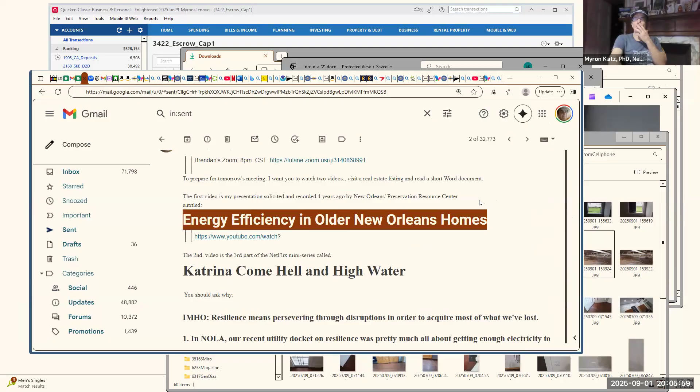The resilience that the city council focused on in their recent docket was about making sure we have enough electricity after a storm, so we can keep the lights on and the refrigerators running. As important as that is, it pales in comparison to the issue we're currently talking about, which is featured in this part of the Netflix movie: building buildings right, and when they weren't built right, how did it really hurt people? We're going to be talking about that.

And the third kind of resilience is resilience against climate change. Those are the three kinds of resilience we're going to talk about tonight. The content we get to choose from is way, way more than we could ever play in an hour. In fact, just one of these three Netflix things is almost an hour by itself.

And then there's also this thing that I gave you a poor link to, which is the energy efficient homes talk I was giving. So I'm going to jump around a little bit in here until we sort of find our place, and then I'm going to open up for questions.

So, Myron—but before you... yeah, he has his hand raised. Okay, what's that?

The stuff I'd find most potent on this takes about 5 minutes to present. I don't want you to tell us about climate change right now, I know. It's a trifecta, because what I'm really calling for is people to monitor this stuff. Okay, well, we're not doing that tonight—we hardly have time for what's on the agenda. Just join the agenda and comment on it, and if we run out of time, you can do your thing, but I don't think we're going to have even enough time. I'm definitely interested, Tor, just to let you know. So yeah, what Myron's done with this—you can tell us more, we'll make sure to put it on the agenda at some point.

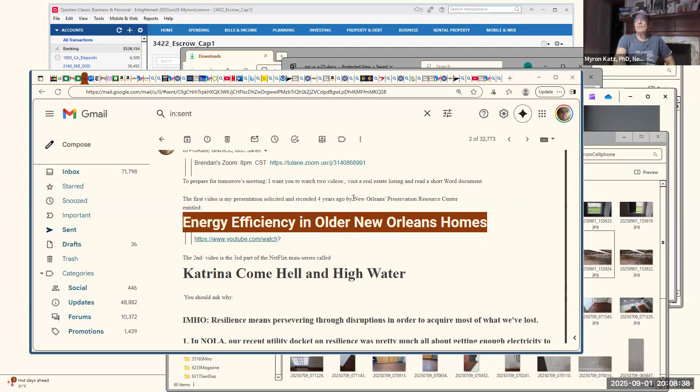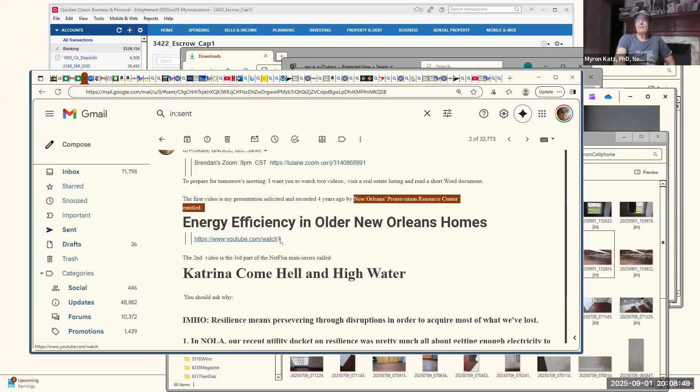I actually was asked to present to the New Orleans Preservation Resource Center about 4.5 years ago. The video is here, although unfortunately the link isn't the right one because it doesn't tell you where to go. But I actually do have it dialed up over here.

So this is the actual presentation, and I also have it—let's see—so I'm going to come back to this timestamp, which is about almost 3 minutes before the end of the meeting.

Let me just go to the beginning of it to show you what happened. So, as I said, I was asked to speak, and that was the title of the talk: energy efficiency in older New Orleans homes.

And it starts with introductions by this person here, I'm sorry, I don't know the name, and her supervisor. They talk, and then they eventually let me talk.

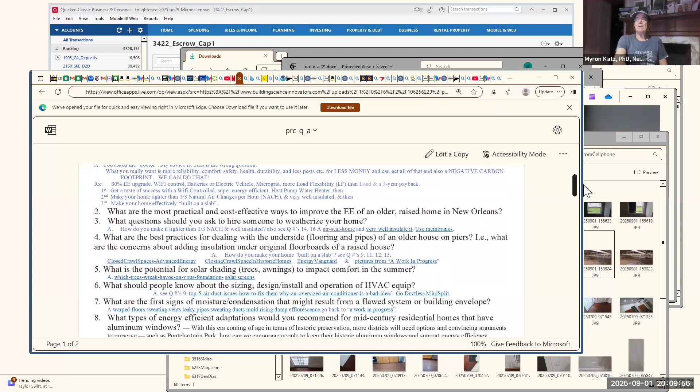What I do is I take a Word document which collected all the questions. Here's the same Word document I put together for the talk. You'll see there are a total of 17 questions they asked me to talk about, and I was given a hint as to which one was most important. So I talked about the first 3 first, and then pretty much ran out of time. By the time I finished the next 3, we got some Q&A.

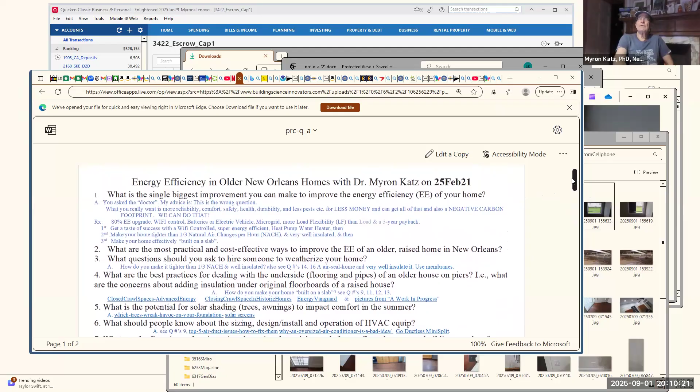The question that was asked most often is, what's the single biggest improvement you can make to improve the energy efficiency of your home?

I quickly say that energy efficiency is not the right question. The right question is resilience, which is what all these words together sort of come together: reliability, comfort, safety, durability, and less pests. And do that for less money, and you can get a negative carbon footprint. We can do all of that in a home. Energy efficiency is clearly the first step, but it's not the end of it.

So I start to explain it. I'm going to give a little bit of a snippet of how I start to explain it, and you're going to see it's very comprehensive, but it's also very time consuming. So we're going to get into this a little bit over here and show you how I start off, and we'll play it from wherever we are.

Okay. I don't know why it's going slow. I do not know why. Okay. Come on, this is possible. Well, you can press the play button or you can refresh. Oh, you're right, I forgot to press the play button.

We're going to focus on the energy efficiency upgrade part, to get a taste of success right at the beginning with a Wi-Fi controlled, super energy efficient heat pump water heater, and see how far it takes us. And then we'll make your home tighter with 1/3 natural air changes per hour and very well insulated.

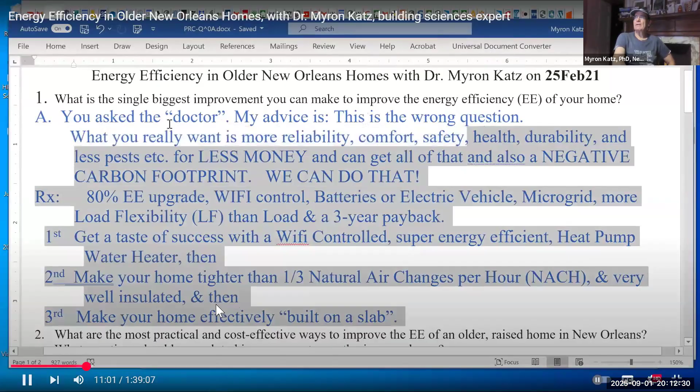And make your home effectively built on a slab. So I'm going to do that with a series of graphics, and these graphics literally come from links on this page. I'm going to minimize this size again and show you where the links are so you can find them yourself.

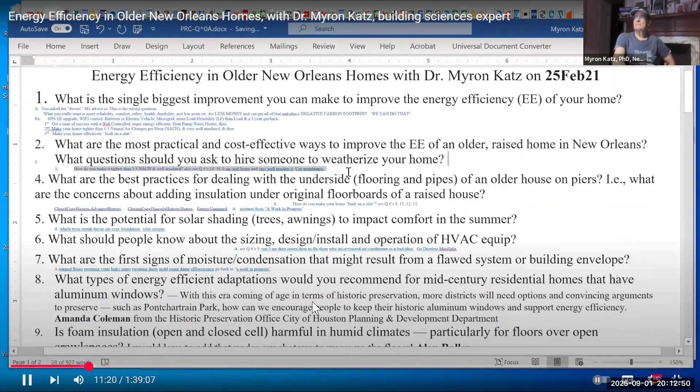So this is one of the links we're going to go to, Air Seal Your Home. We're going to go there afterwards, but I'm going to go there first so you can see what I'm talking about. Let's see, go up to 16 on this. And this is a link right here: Air Seal Your Home is an active link, as well as very well insulated, as well as use membranes.

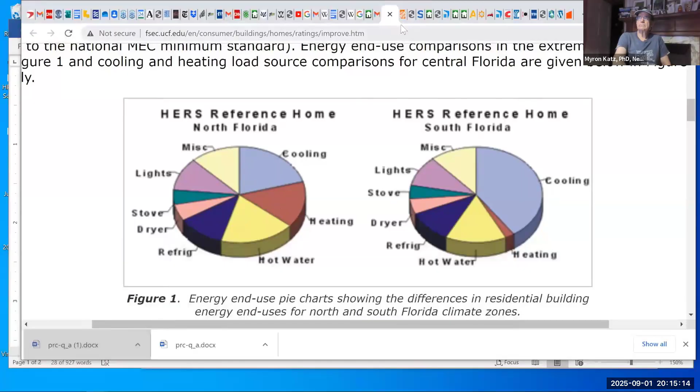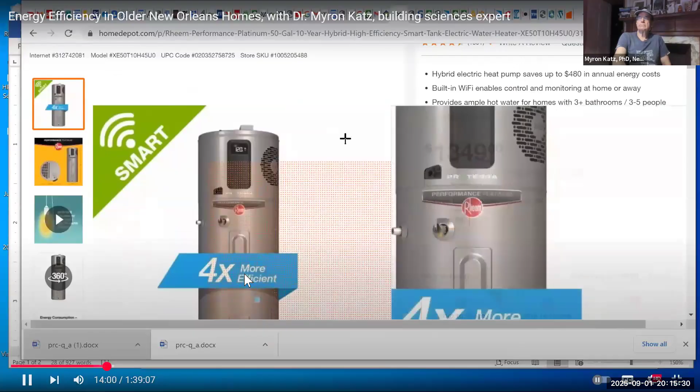First of all, I want to tell you what I promised. Remember, I said I want to get your home 80% more energy efficient than it was before. The first thing I recommend, since it was asked what's the most energy efficient thing you can do, is buy this water heater. This is a water heater that's 4 times as efficient as the one you have, which means that $200 cost for water heating will now go down to $50. And it costs under $1,400, but you get $700 in rebates, which means you get it for $700.

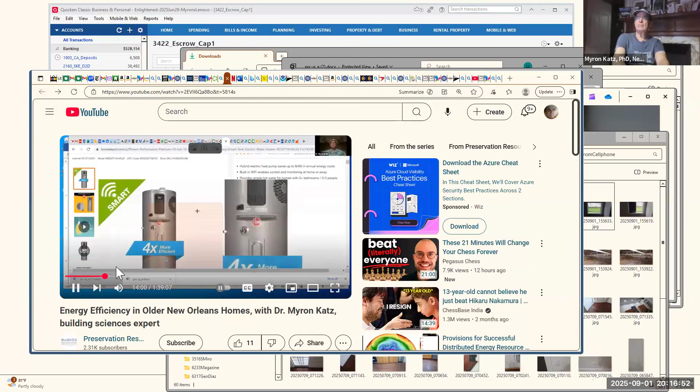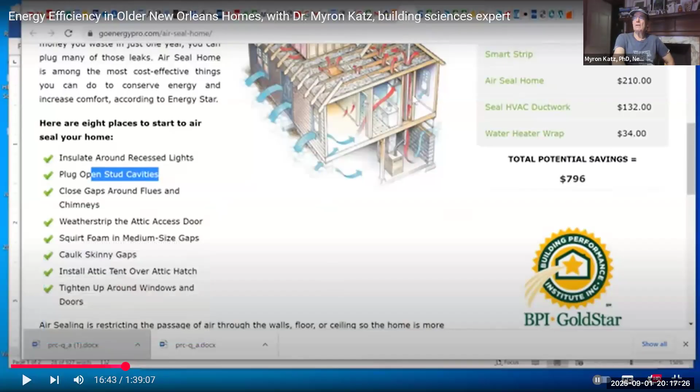This is a part of the slide talk where we talk about what an old home looks like and all these various defects. It leaks around the windows and the attic vents, and this thing, which I described sort of like a pocket door. I go a little further and talk a bit more, jump further down to it, and I say, okay, we want to fix all these things.

And I show lots of technologies, including putting plastic into the insulation, tightening the windows, putting a radiant barrier under the roof. But one of the biggest ones is enclosing the crawl space. All those are explained in pretty good detail, over and over again.

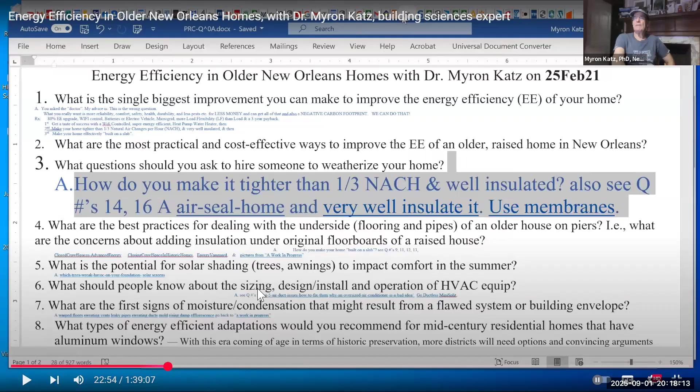And even at the Q&A at the end, people say, well, how do I insulate under my house? And I say, you use a closed crawl space. Then I say, well, how can you get your insulation working super well? You encapsulate it into membranes, and that's explained in here too. I'll jump to that part where we talk about the membranes, okay?

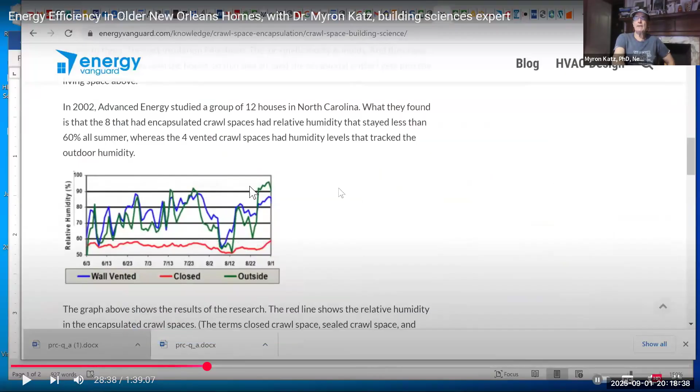So let's see. This is about enclosing the crawl space, and they show you that a home that does have an enclosed crawl space, the humidity goes very low. It jumps all over the place without an enclosed crawl space. Very big deal in New Orleans. So you want to enclose a crawl space. Not only that, the ground below the home is around 71 degrees year round, so why would you want to insulate your house from that? It keeps it cooler in the summer and warmer in the winter.

So I actually go through a description of studying an average balloon frame home in New Orleans. This is how we build them if they're balloon frame, which is something we stopped doing over 100 years ago. And I showed how you might do an enclosed crawl space, and this is a work in progress. I'm skipping because there's too much to explain. Then I go back and explain: if I make the home tighter and effectively build it on a slab because I've closed the bottom of the home...

The open crawl space is now closed. I'm moving it toward this scenario and getting the energy bill way lower.

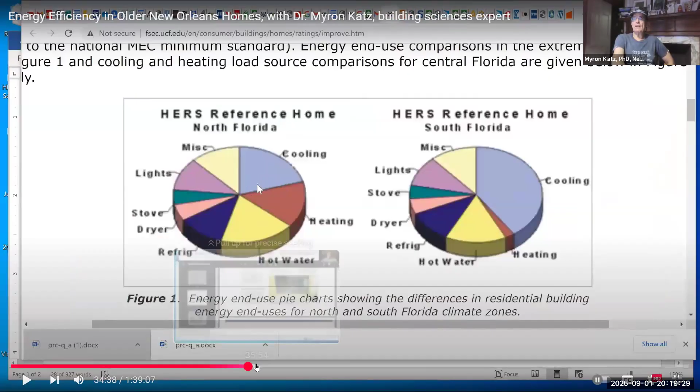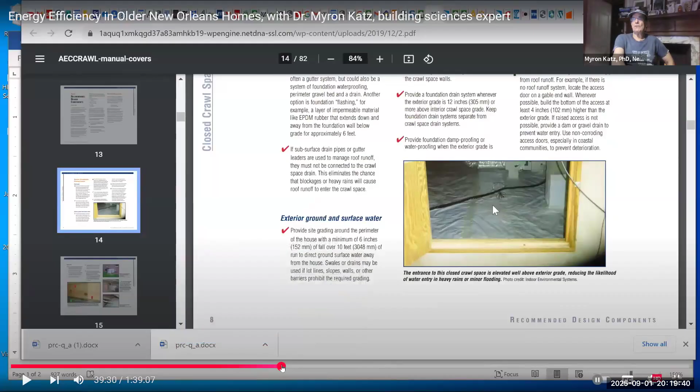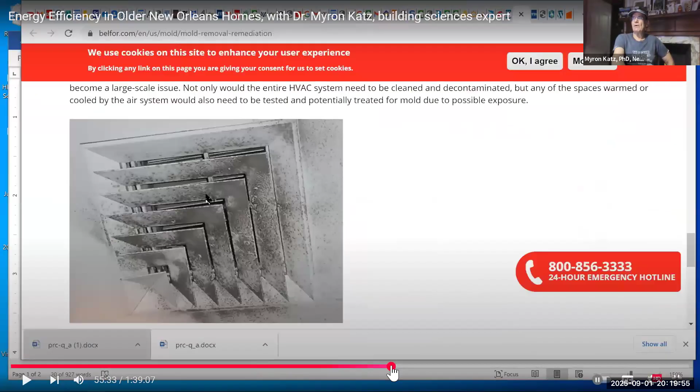This is all explained in extensive detail in an hour and 40-minute video, which we had a chance to look at. Near the end of the video, I want to show you the various reasons why you shouldn't use ducted air conditioners. You should instead go with a ductless mini split. I explain why, because of moisture problems that can occur and can be avoided, even efflorescence, which damages brick. Then I explain this is the kind of cooling system you want.

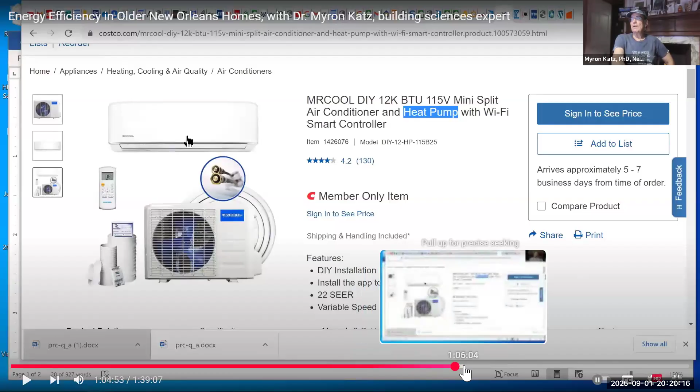I'm not going to do it now, because if I did, I'd spend a similar amount of time as that talk, an hour and 40 minutes. What I want to do is get to the very end of the talk, because it touches on the resilience issue we were talking about.

That previous picture shows that a heat pump water heater is really an air conditioner on a tank, and that's why it works four times better. But getting back to this picture again, how you make the house tighter. Making the house tighter is far more important than anything else.

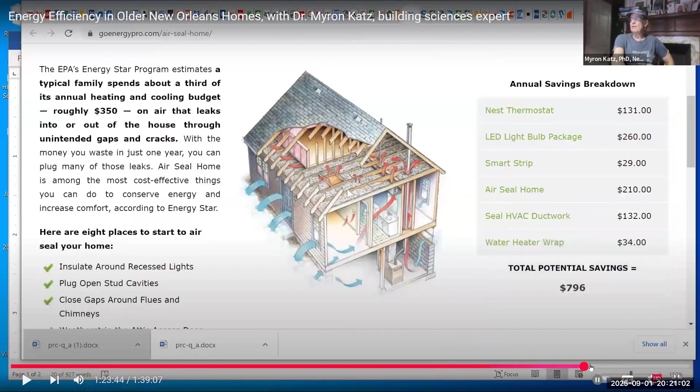So I said you need to do it, and then this is where the weather stripping example is explained. At the end of the talk there was a bit of a Q&A, and I'm trying to get to the end of the talk. By the way, this is on our Building Science Innovators website, in the presentation section, where you'll find the same document we're looking at.

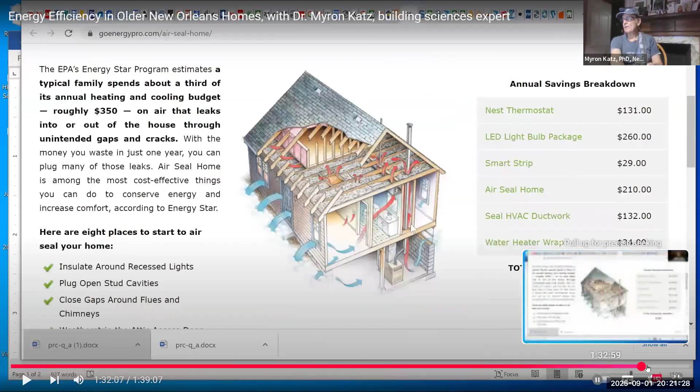If you want to see the video, you can find it on YouTube, since that's where it is. At the very end of the talk, I want to play the part about the resilience issue. It's about right here, I think. Let me press play and get us to listen to that.

So electricity when it's cheaper, like the windmills in Iowa, we get the advantage of that. It's very, very good for the environment that we buy electricity when it's cheaper, because we buy it when it's cleaner. And if we have the economic incentive to do it, we can make money.

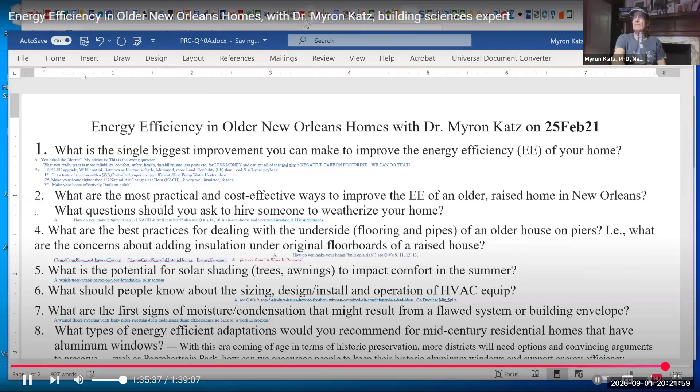Even a simple electric water heater, which is what this slideshow was talking about, if we choose a regular electric water heater with the retrofit we're talking about, it will generate $185 a year in income just by changing when you charge it. From charging at any time to charging in the middle of the night, you can get this much income, and that's only available with this time-of-use rate called CLEP that I'm trying to propose.

And if people get excited about my deep understanding of building science, maybe that will segue into respect for my ideas and generate a groundswell toward a solution that can save your money and save the environment. Maybe New Orleans would be a place you can walk in 50 years instead of swim. Let's hope.

The comment that this was fascinating but also overwhelming really underscores how much of a topic this is that people care about and want to know more about. We'll try to take deep dives on specific elements of this. This was incredible, Dr. Katz, that you could give us this big overview. Maybe we could come back and do segments.

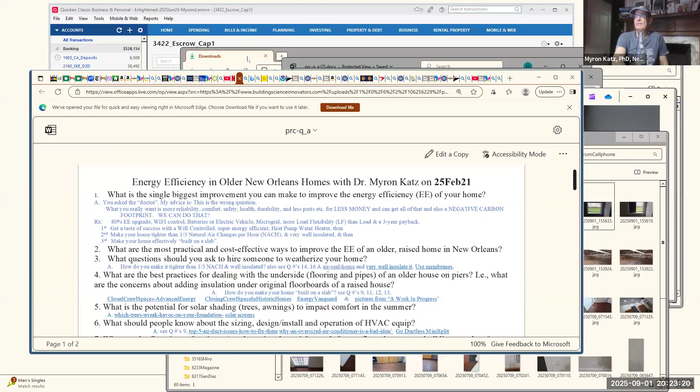I'm gonna jump out of this because we're not interested in listening to how I'm lauded, and instead try to jump to the other video, which is the video from Netflix. Let me try to get there, and I have the windows open for that.

Here's the Netflix video, and as I remind you, this is the Katrina: Come Hell and High Water video. It's a three-part series, and I think by far the most important one to watch is the third one. I'm focusing on how to build a home so it's resilient in this particular part of the talk.

Its footing and showing an incredible amount of resilience. If we can save the Ragged Boot Heel of Louisiana from climate and New Orleans disintegration, then that's a big message for the rest of the country. We were the heroes of the Ninth Ward, and he was one of those heroes.

Brad Pitt, the savior of the Ninth Ward, he was our savior, and he brought this new project, this green project, this carbon footprint replacement project to our community, and he brought in 150 of those families, built 120 houses.

But ultimately this is not about me, it's not even about all the people who have been working so hard on it. I'm pausing right here because when Global Green presented this idea to the building science community and the architects, we jumped on it. When I say we, Christopher Faust jumped on it, and other members active in our list, we jumped on it and said we want to compete, we want to help design the home that's replicated in New Orleans.

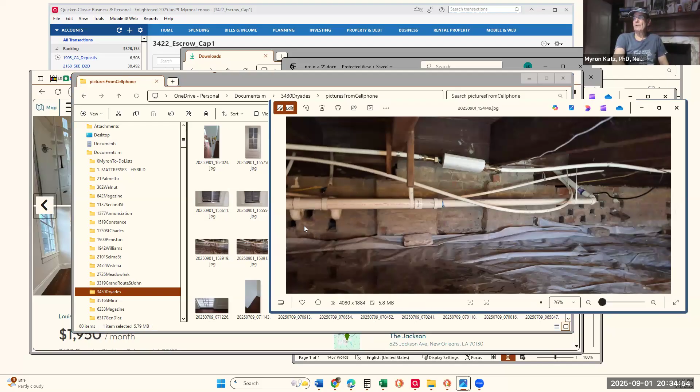So if I go to a slightly different view, I'm going to show you what it looks like in the crawl space. I'm going to go over here, and this is a view in the crawl space. It's not very pretty because there is some water on the ground. However, you're going to see other pictures of the crawl space. Let me see if I can get to the other pictures over here.

Okay, these are pictures taken in the crawl space today at the end of the summer. And all of these condensate pipes from the ductless mini splits dumped into this crawl space, and there's a residual about 10 gallons of water. You'd say, oh, that's a disaster. On the contrary, it's a success because these air conditioners probably put 2 to 5 gallons of water each day, and throughout the whole summer, this is the residual.

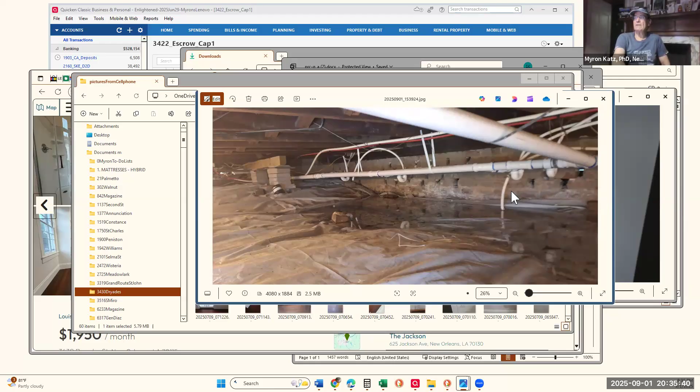I actually knocked on these walls. These walls are all solid. None of them have any mold concentrations on them. And it looks like a disaster, but it's actually a success. Some of these condensate lines should have been actually put into these drains, and that would have decreased the amount of water that got in the ground, but it never caused a problem.

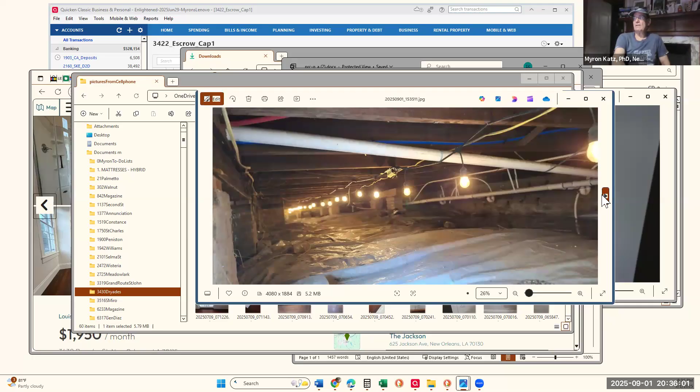These are more pictures of the crawl space. It looks at first like it's a problem, but you can see it's bone dry all the way through here. The spiders love it, and that's what it looks like. Okay, and I did that today to show you that you can build something right and it's durable. And you don't have to build a new building to show how to do it. You can do it with a 140-year-old building.

So this segues to pictures I have inside the building, which is not so much the point. But I do want to show you some of the features of the building, which make it very, very important. So instead of going to these pictures, I want to go to the document. It's the same document that's at the end of the email. It was the attachment.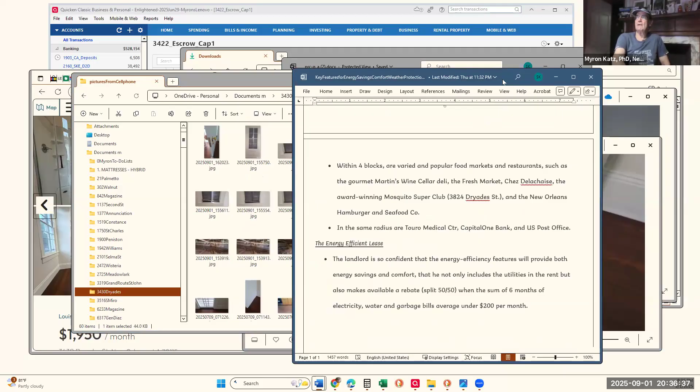This list of key features of 3430 Dryades Street was put together by my wife and I in order to help the tenant, first to attract the tenant, and secondly, after the tenant moves in, to get them to understand what the features are. And the first feature right here, I'm going to explain this with pictures. It says there are 5 screen windows and 4 pairs of exterior shutters that are fully operable from the inside. You may not realize how incredibly unusual that is.

So in the pictures you saw before of the house, let me try to get over there. In this set of pictures, you see that there's shutters on the windows. See, there's 4 pairs of shutters. Now, normally shutters can only be opened from the outside. Why? Because there's a screen between the windows and the sashes, so you can't access those shutters.

But in fact, I'm going to show you with the pictures I took today. I'm just trying to get there. This is one of the pictures in the series, so I can get it to go. Okay, so what I did was go backwards. I stepped back and took a picture of the whole window.

I'm inside the first bedroom from the front of the house, which, by the way, I can show you among these pictures which room that is, but it doesn't really matter. You can see it's a room like this room, where this is the same window we're talking about, viewed from a different angle. Okay, this is the window. Let me show you the window before it's opened. This is before it's opened. And if you look closer in the picture, you can see me in the reflection in the mirror.

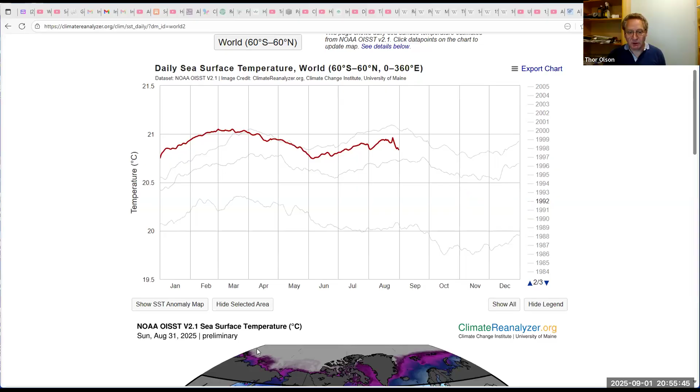But what I really want to point out is that in the 20 years since Katrina, sea surface temperatures are up almost a degree Celsius. And that is my reminder of how much change has happened over that period of time globally. There's been substantial technology changes, substantial demographic changes. I'm not trying to scare you with all this information, it's just that I struggle to express to the wider community of GNOICC and ProRate how much change there's been in the background.

Your motivation to improve the efficiency and the quality of the houses is admirable, it's right on target. My uncle did the same thing - he'd buy a rundown house and fix it up. That was entirely appropriate for that period, from 1980 to about 2005 when Katrina hit. So much of the things about ProRate are designed about making us better prepared for the next Katrina, which I think is spot on and admirable.

But there's these new players that weren't there 20 years ago. Maybe the most formative - I'll just paraphrase it - I had a dialogue with one of the top climate scientists, and I showed the week of anomalous temperatures out of Antarctica. They said, okay, we are now in a tipping point situation because the model is so broken at predicting the poles that we can no longer trust the models. Now, that's the atmospheric scientists. The oceanographers I work with and the geologists I work with, they're all saying no, this model fits with what we were expecting.

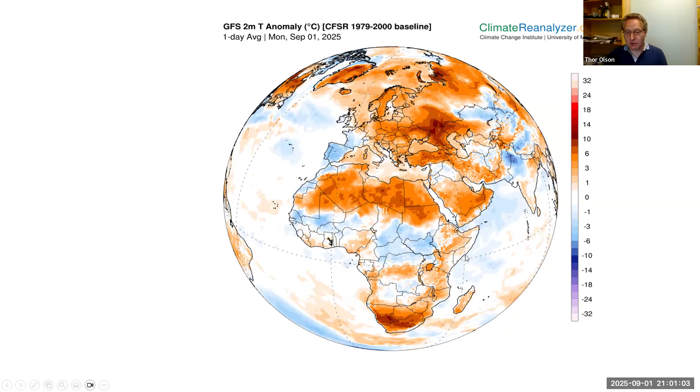Africa is the only major continent that spans the equator, and you're getting kind of this bookends effect — you get a cold band, a cold band, a hot band, hot bands. This really caught my attention because you're reaching 4 sigma, solidly 4 sigma there in Libya. Yesterday it was in Egypt — I captured that as well.

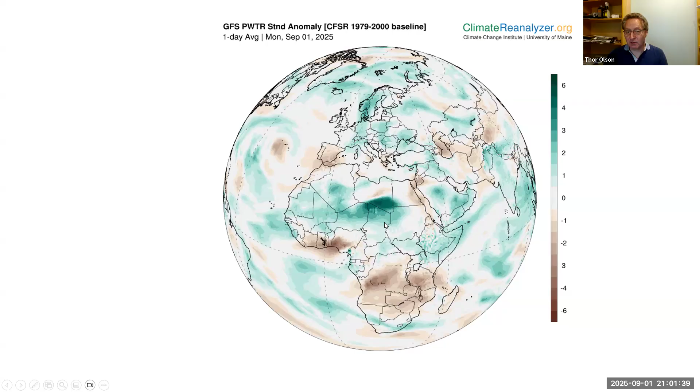That raised some weird questions, like why is there a drought in Nigeria along this coast while Zaire is as soaked as you get? It's being dry where it's supposed to be wet, and wet where it's supposed to be dry. The winds — and this gets back into astrophysics — are accelerating, so it makes sense: it's pushing air off the coast inland, into Libya. You're getting a shoving game around the globe.

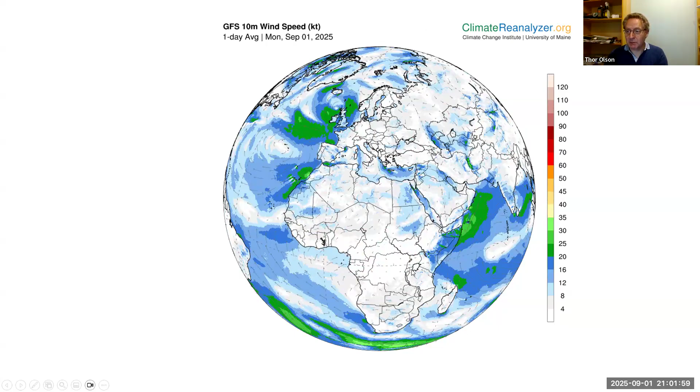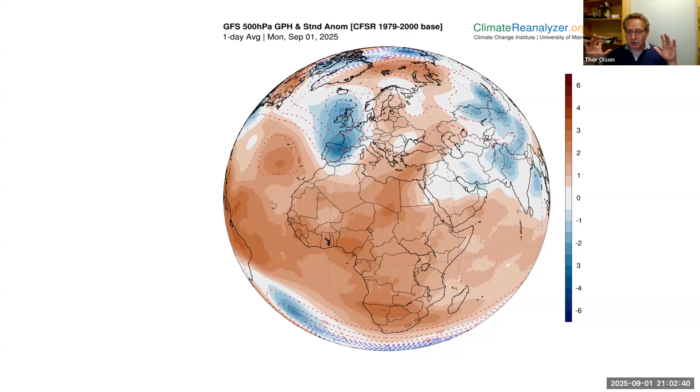So I'm studying this effect on Africa. Normal weather is between 1 and 2 sigma — that's 95% of what you should see. Rarely a 3 sigma.

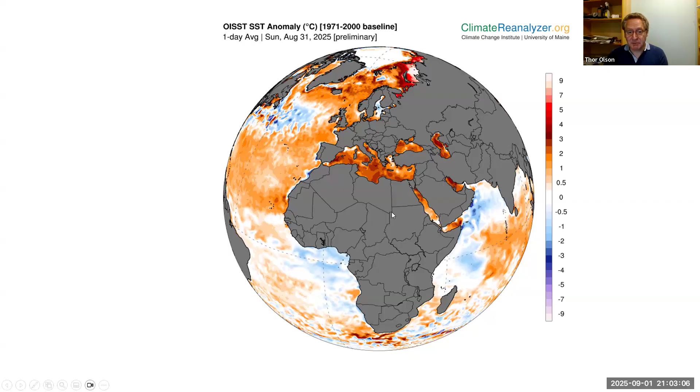I'm looking at the Mediterranean because these are contained bodies of water. At one point the Mediterranean was coming in at 9 degrees Celsius hotter than normal. This part of the area up here is very shallow, so it's not big — about 11 degrees Celsius hotter than normal. But it's hot here, cold here, hot there.